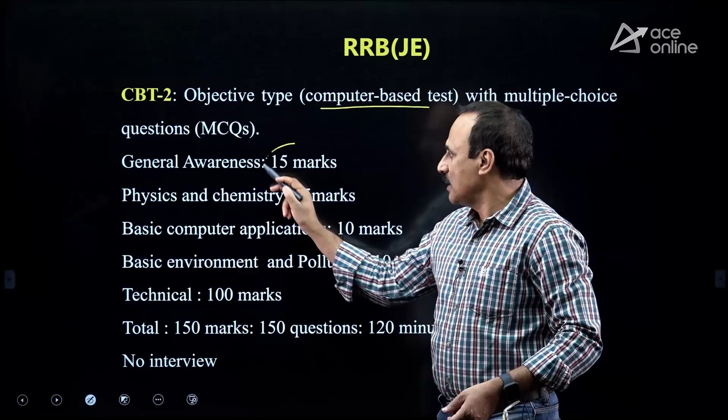Now we'll just touch the process. CBT-I is already over. Now coming to the CBT-II, it is also a computer based test with multiple choice questions. Here the main problem is general awareness. You have to be very careful about this general awareness. Physics and chemistry, they are asking you basic level of physics and chemistry questions, but don't neglect this area.

Basic computer applications also 10 marks, and basic environment and pollution 10 marks, technical is 100 marks. So, all together is 50% of the technical. This is actually the deciding area. Concentrate on this area with online test series and all other things. So, technical is 100 marks, total is 150. 150 questions, 120 minutes, 1/3 negative.

Time is a crucial point here in CBT-II also. No interview; after you get very good marks in CBT-II, having already qualified CBT-I, directly you will get the job, no interview at all. So, here today we will talk about transportation engineering. Coming to transportation, we have two parts. Highway engineering is given separately and transportation is given separately.

Two parts they have given, and I am hoping that out of 100 there may be 8 to 9 questions from this area. Minimum 8 to 9 objectives will come from this area, and that too theoretical questions, simple fundamental questions. Few specifications you need to learn by heart, that is all. And critical numericals, don't touch at all. Even though such questions are there, we have very much less time.

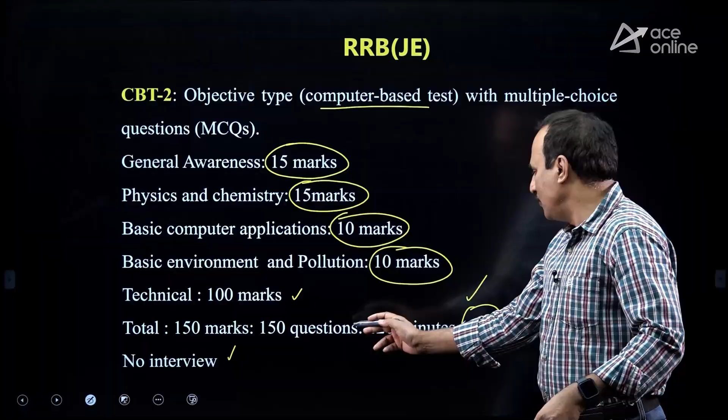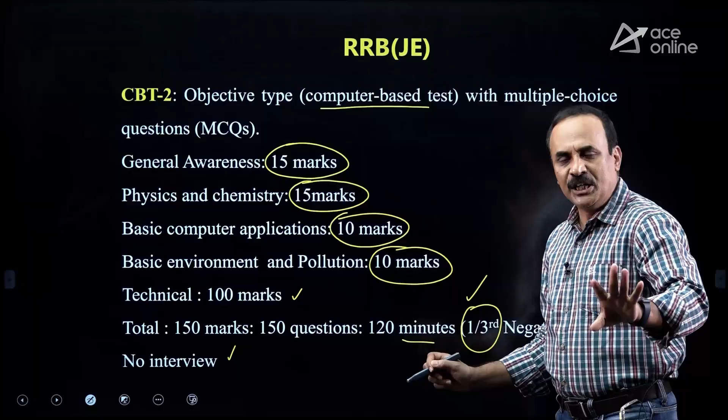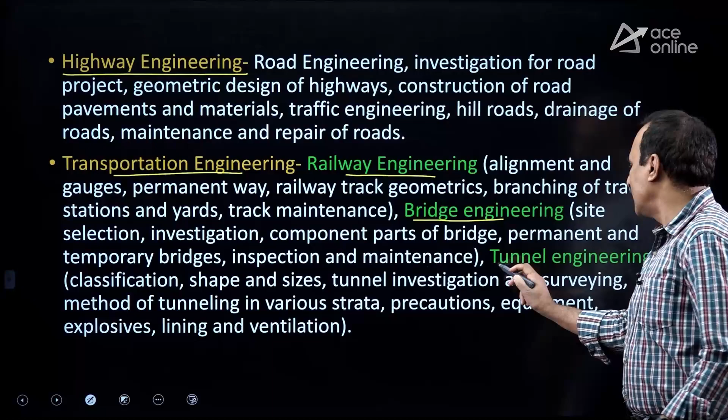You see, 150 questions, 120 minutes of time, less than 1 minute for each question. So, you can't solve the critical numericals. If a critical numerical question is there, just leave it initially. If time is available at the end, touch it, otherwise leave it. So, coming to transportation, here you have railway, bridge and tunnel engineering. Airport is not there, you just remember this point. Airport is not there in CBT-II.

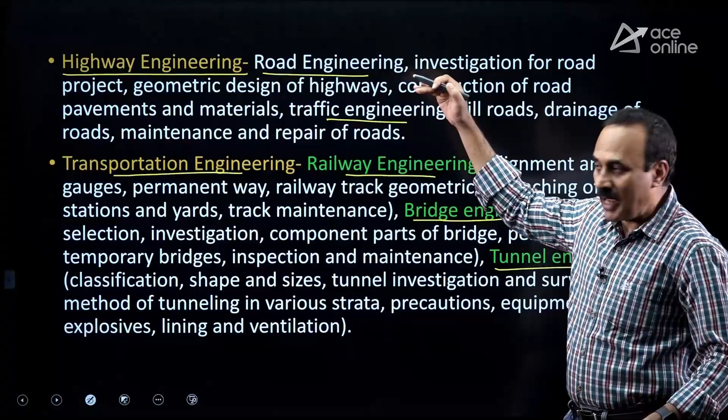And coming to highway engineering, you have road engineering, investigations for the road, geometric design, construction of the road, and materials used in road construction. Traffic engineering is also there. Hill roads, especially the specifications of the hill road, drainage and maintenance and repair works of the roads. So, apart from highway, you have railway, bridge and tunnel.

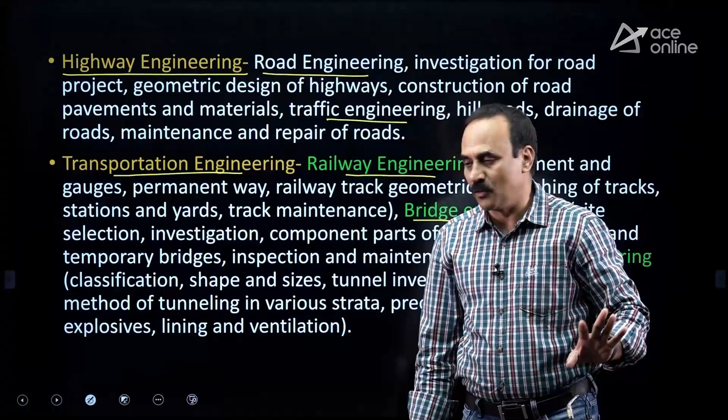Remember, don't touch airport. Previously, airport was also there in the RRB syllabus. You may see previous year RRB questions from airport. Don't touch those questions in the 2025 recruitment. And this RRB, you know, won't come every year. That's why be careful in the preparation. Last minute strategy is revise the concepts, revise the specifications and try to attempt more and more test series. There you can improve upon your capabilities.

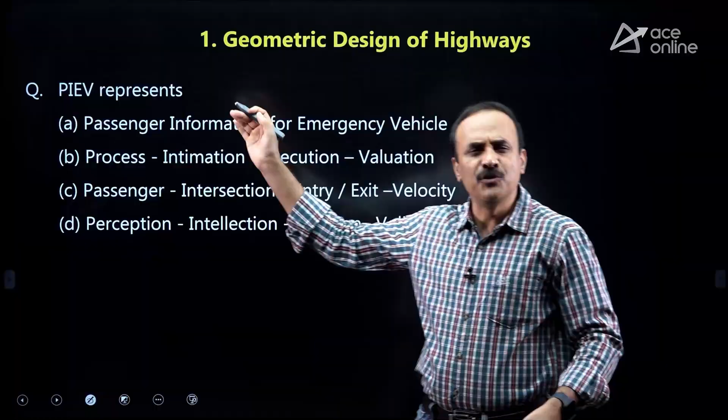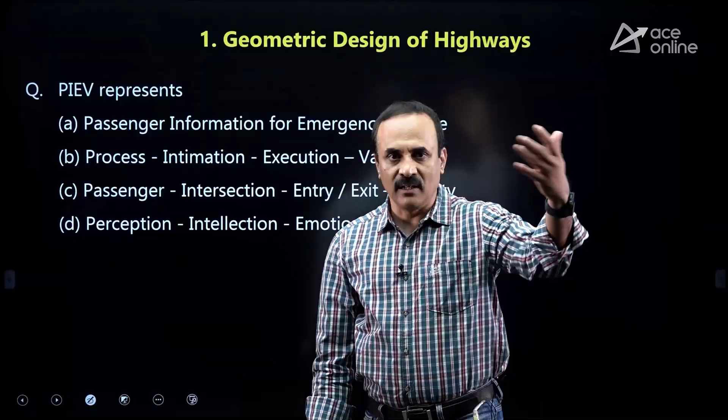We will touch few previous year questions of RRB. Let us see what is the level of questions coming. Mostly basic level questions will come because the prime qualification criteria is diploma in engineering. So, diploma holders, engineering graduates, masters holders, even PhD holders are writing the exam because of the very attractive salary package, and the jobs will be in the local area only. It is not transferable nationally, it is zone wise only. South Central is different, Central is different, Northern region is different.

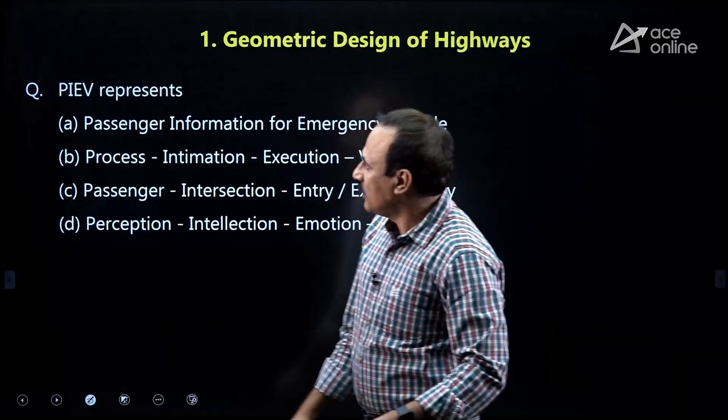So, coming to the first question, with highways, read the question and give me the answer, please.

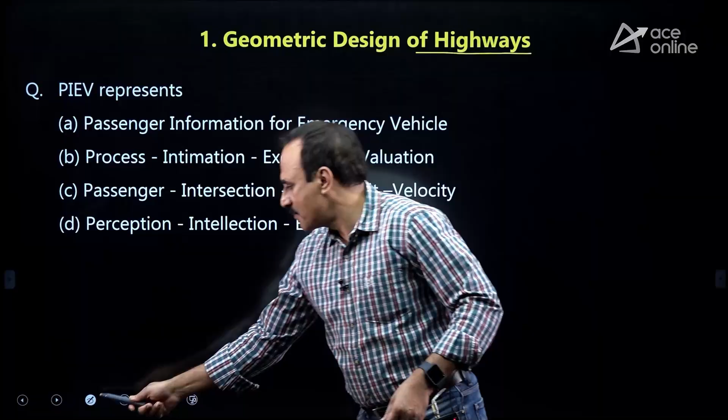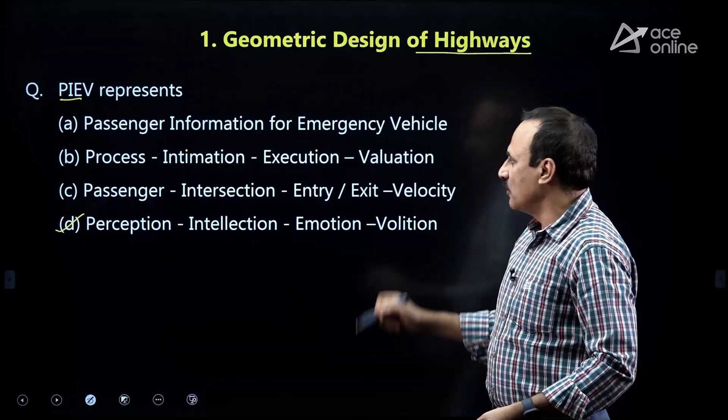If you look at the question, PIEV theory represents, it is a straightforward question; with little knowledge of transportation you can identify the answer. PIEV stands for perception, intellection, emotion and volition. Usually in theory questions, we need to select the answer by process of elimination, not by process of selection.

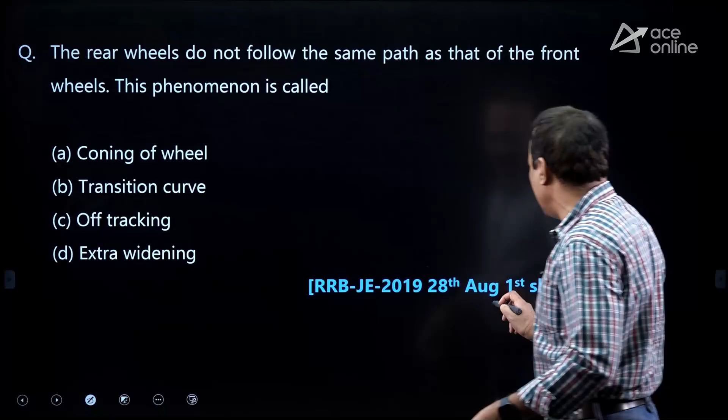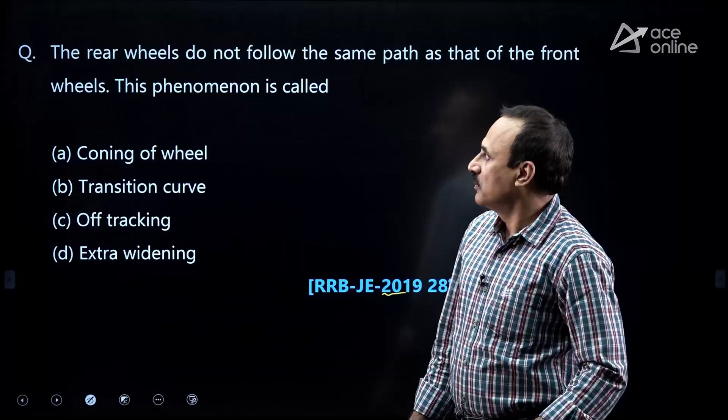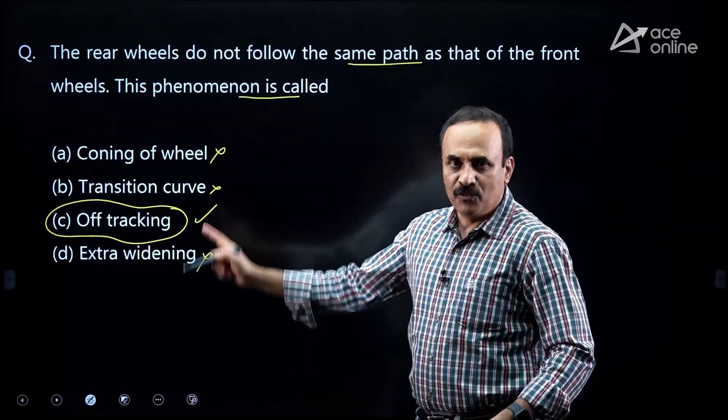The rear wheels do not follow the same path as the front wheels. This phenomenon is called... It is not coning of wheels. It is not the transition curve. Extra widening is to facilitate off tracking also, but actually the rear wheel track not following the path of the front wheel track, we call it off tracking. To facilitate off tracking and psychological widening, we provide extra widening. So, answer is option C.

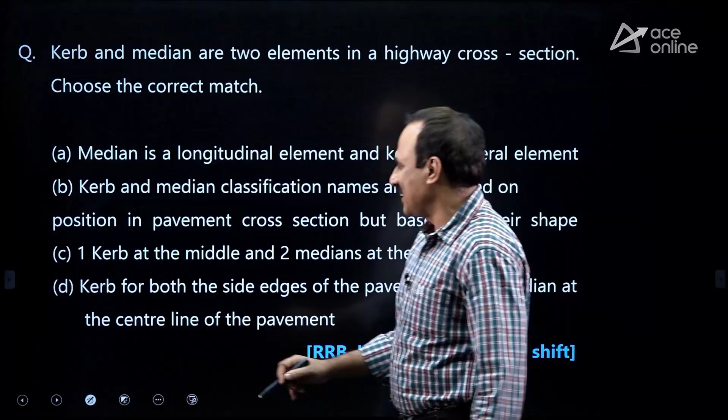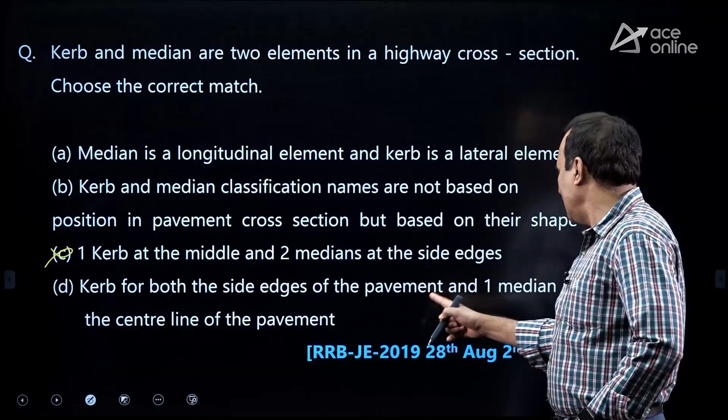Read this question and give me the answer here, please. Kerb and median are two elements in highway cross section. Select the answer. One kerb at the middle, two medians at the side edges. Actually, median means middle, so two medians won't be there. Process of elimination. Kerb for both the side edges of the pavement and one median at the center line of the pavement. Sounds good. Let us see the other statements also.

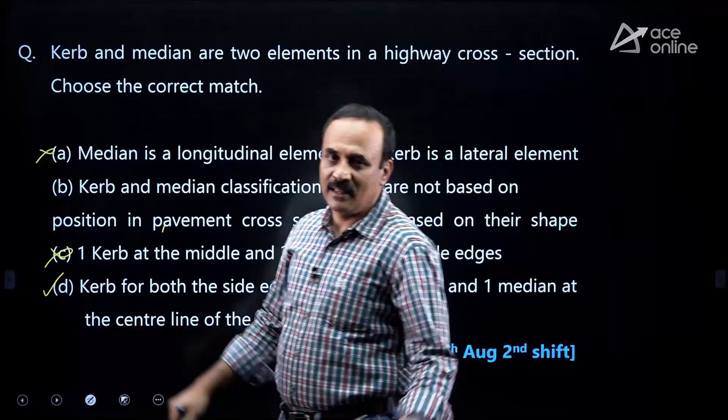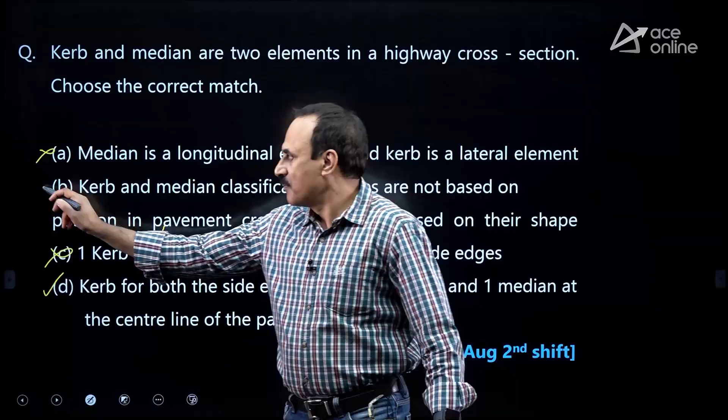Option A, median is a longitudinal element and kerb is a lateral element. Kerb is also along the length of the road, so kerb is not a lateral element. Kerb and median classification names are not based on the position in the pavement cross section, but based on their shape. No. Most appropriate answer is option D. Kerb is the edge of the pavement, median is the middle of the pavement. It is a traffic separator.

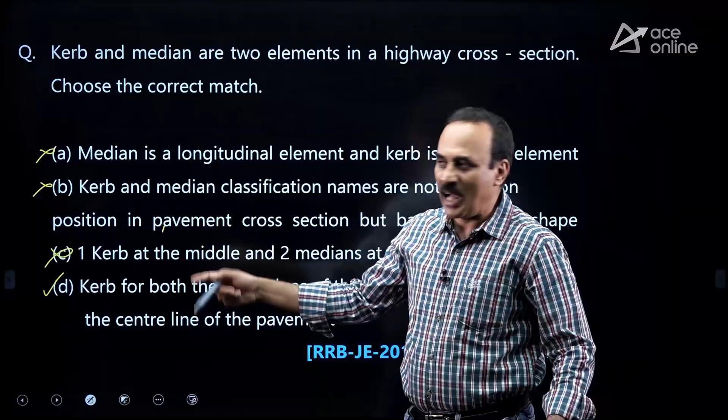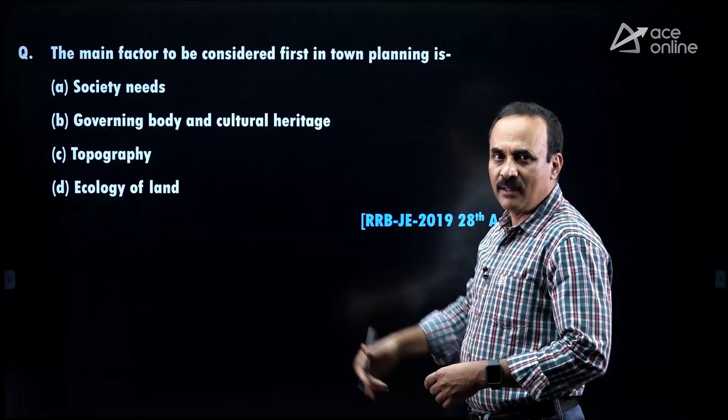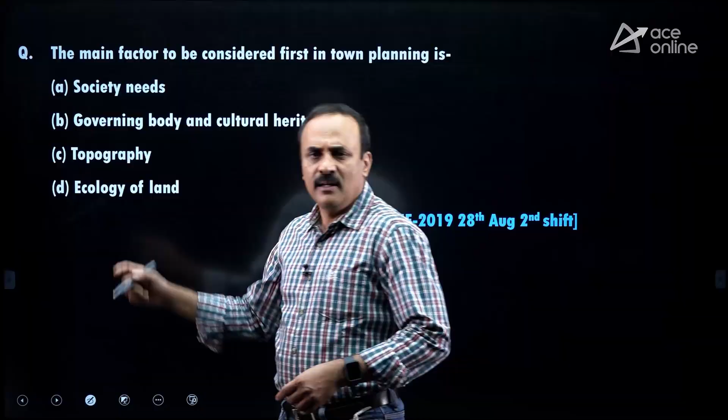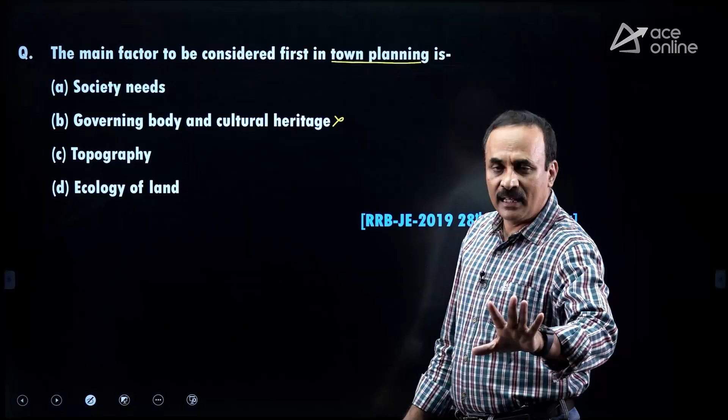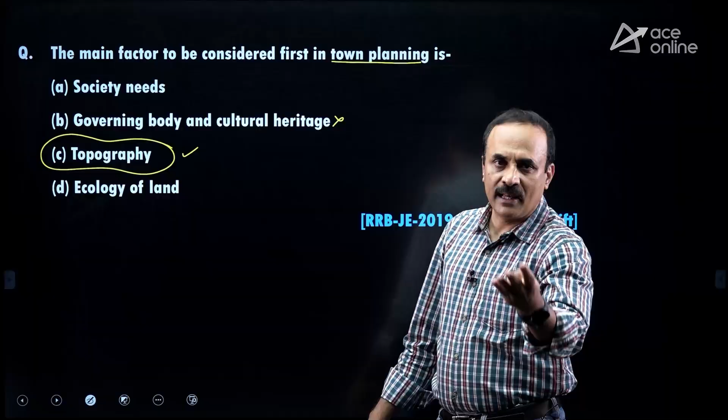Read this question and try to pin the answer. The main factor to be considered first in town planning. Actually, town planning is not exactly in our syllabus, but use the process of elimination. Option A, society needs, governing body and cultural heritage, you can eliminate directly. Topography is nothing but terrain. Ecology of land. Actually, the main factor in any road construction or planning work depends on topography, the terrain in a particular area: plain, rolling, hilly, mountainous or steep terrain. That plays an important role. So, the answer directly goes to option C.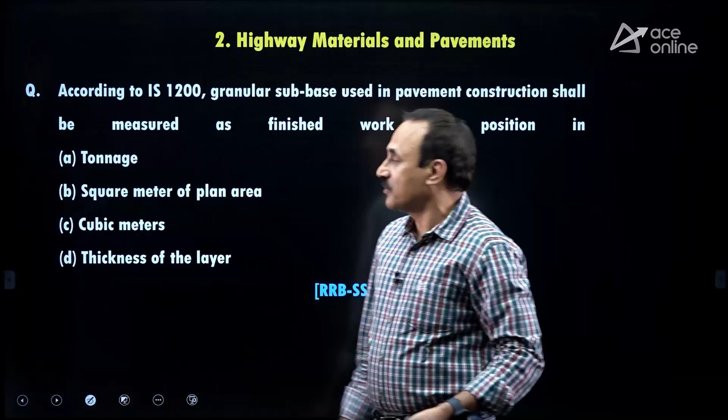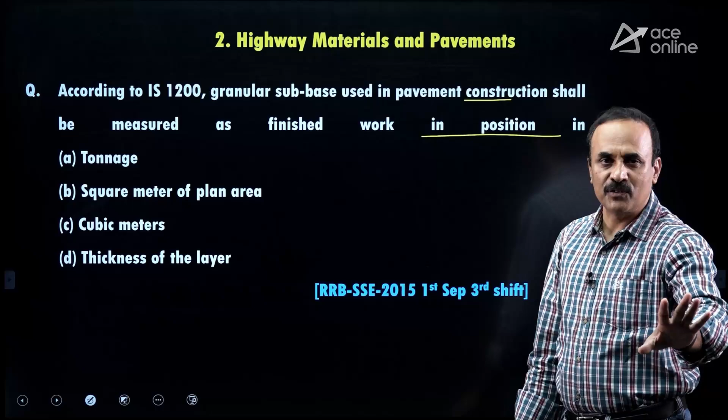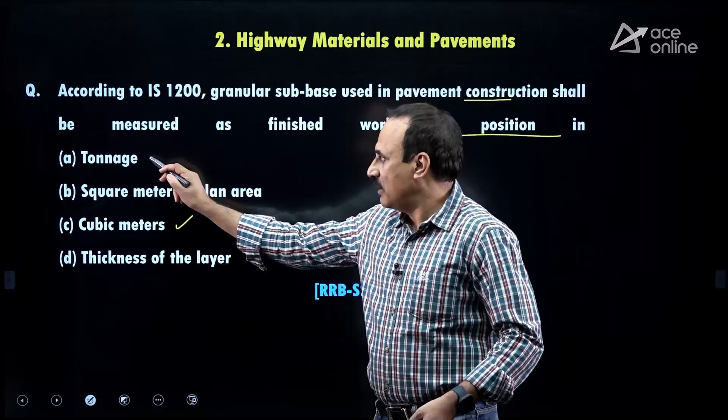Again read this question and try to give me the answer. According to IS 1200, granular subbase used in pavement construction shall be measured as finished work in position in which units? This is an estimation type of question in transportation, but the quantity of base course and subbase course is in cubic meters. We never use tonnage, never plan area in square meters, not by thickness; it is by cubic meter. This much cubic meter of material is required for subbase. Like that we estimate, and based on that we procure the material and use it.

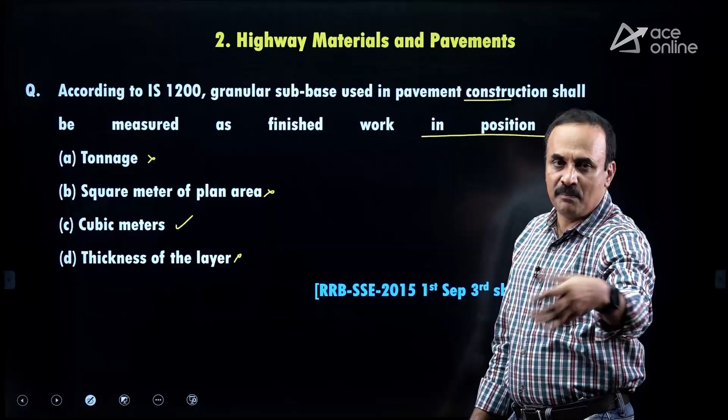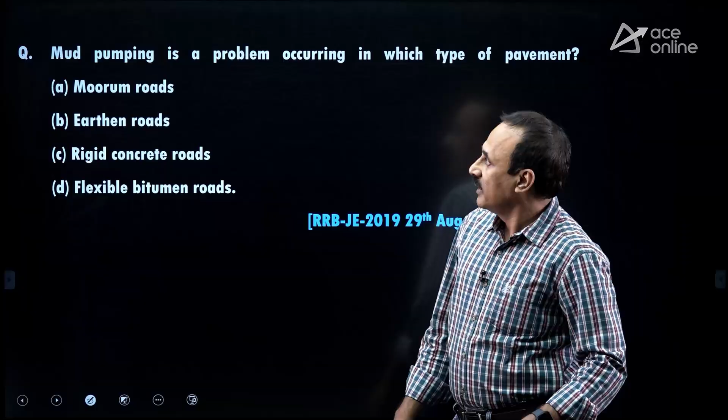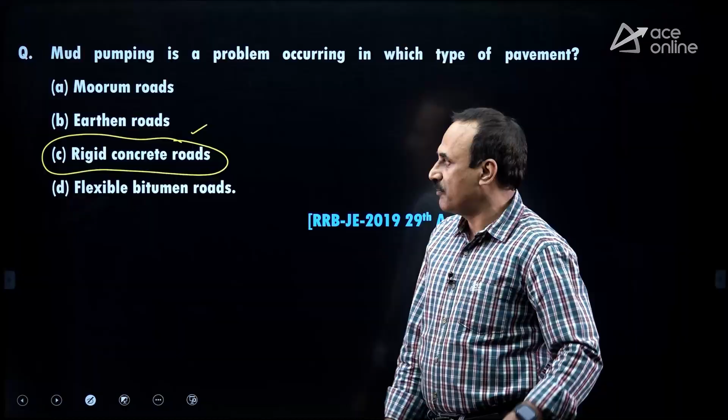Next is: mud pumping is a problem occurring in which type of pavements? Mud pumping is generally a common failure in rigid concrete pavements. Mud pumping is a very common failure in rigid pavements. In rigid pavements, we have only three types of failures: mud pumping, scaling and spalling.

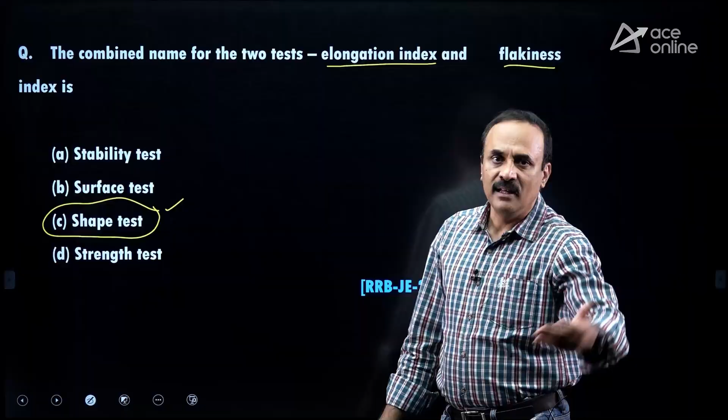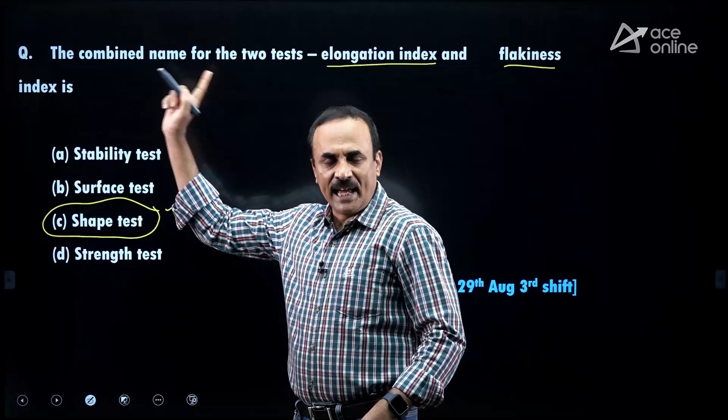The combined name for the two tests, elongation index and flakiness index. Actually, elongation index test and flakiness index tests are shape tests, which determine the shape of the aggregate which you are using in the road construction or concrete making. Usually we require angular shape. So, shape test is very important. The flakiness index and elongation index come under shape tests of the aggregates.

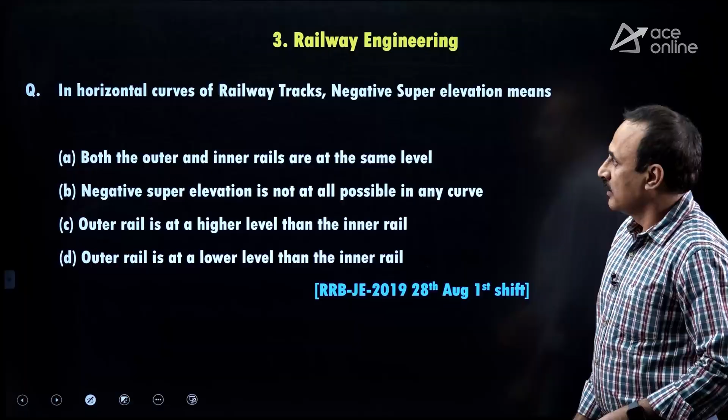So, look at the questions, these are from railway engineering. Simple questions came in the previous years. Look at the first question and try to give me the answer. The horizontal curves of railway track, negative super elevation means: positive super elevation means outer rail at higher level, negative super elevation means outer rail at lower level compared to inner. So, outer rail at lower level is negative super elevation. Positive super elevation or general super elevation will have outer rail or outer edge at the higher level compared to the inner. So, answer is option D.

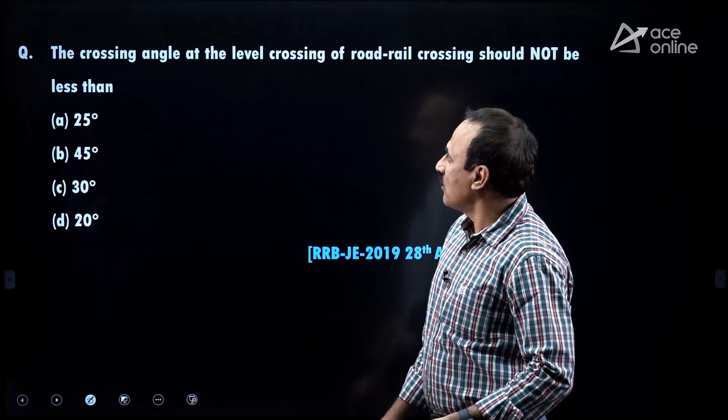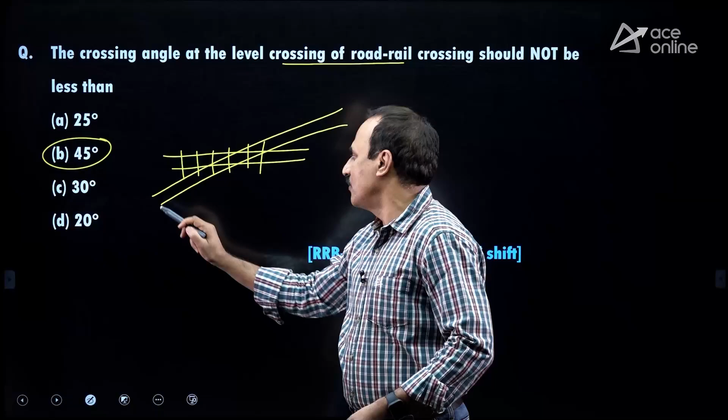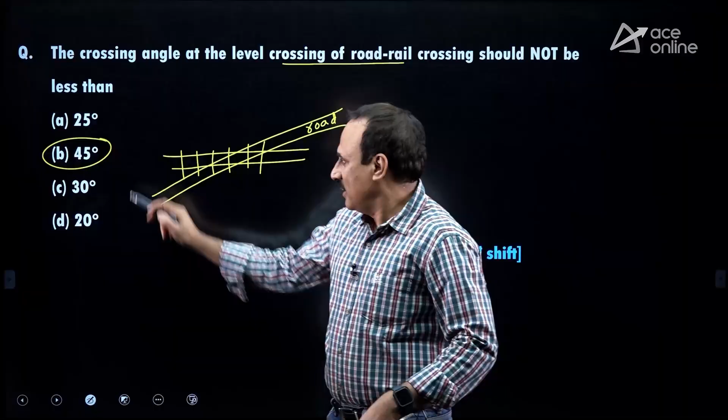Coming to this question, the crossing angle at level crossing of road and rail should not be less than 45. Level crossing means there is a railway track and a road is crossing that. If the road is crossing very parallelly, with less angle, then making the level crossing is difficult. Even while crossing, the visibility is also very poor. That is why, as per Indian railway standards, the level crossing angle should not be less than 45 degrees. Better is right angle intersection.

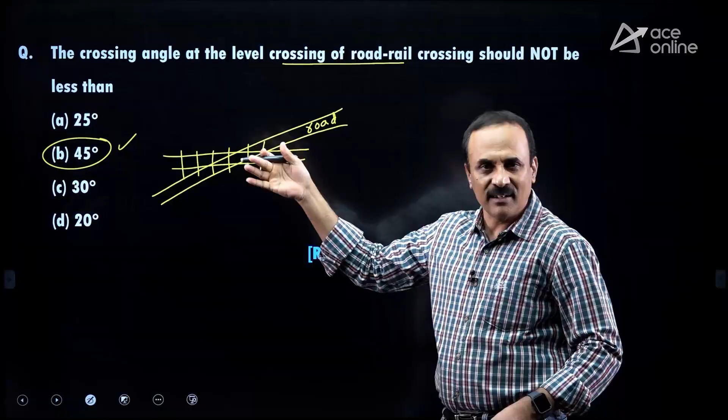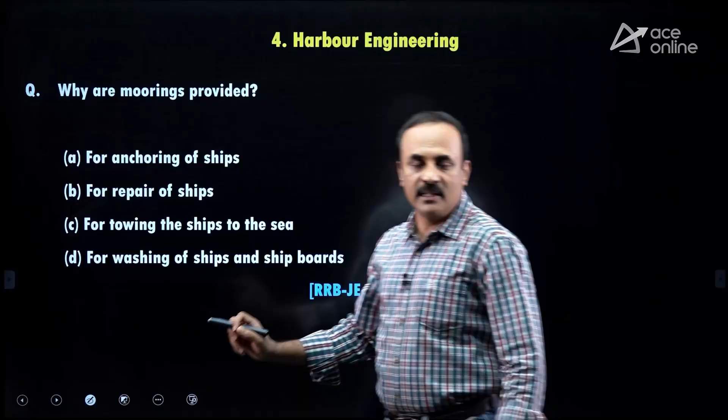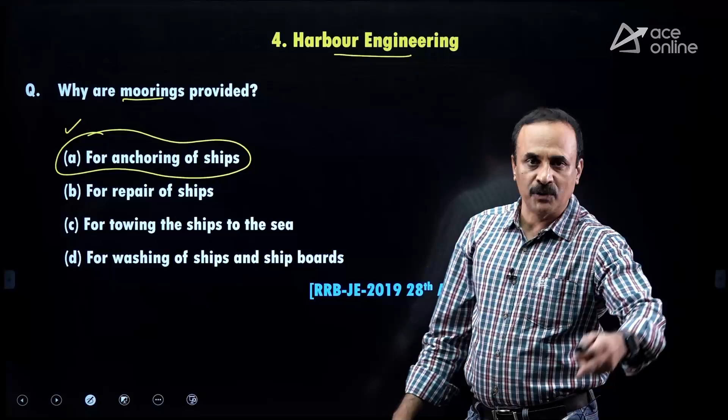Look at the previous RRB question, it comes from harbor engineering. Read and tell me. It is all based upon the terminology. In harbor engineering, if you remember terminology, it is more than enough. Mooring. Mooring is nothing but anchoring. Why are moorings provided? Moorings are provided for anchoring the boat or ship to the support. Okay, answer is option A.

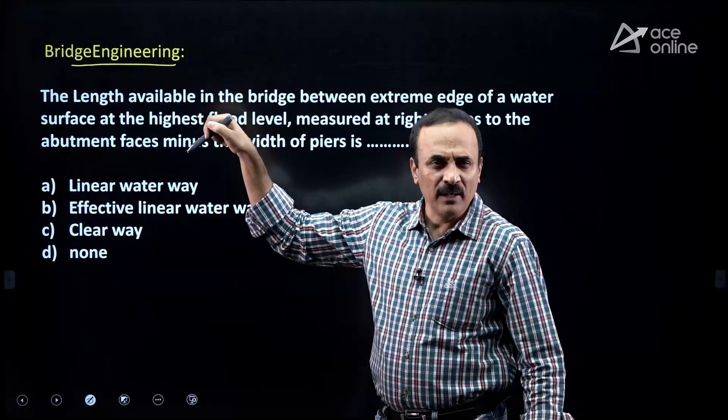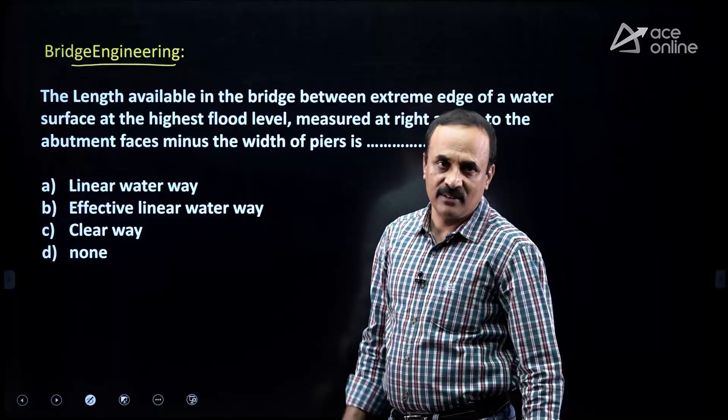Look at the questions. In the previous RRB, bridges were not there, it was included now. So I have taken general questions and important questions from bridges and tunnels. Previously, there were no RRB questions from bridges as well as tunnels. We will just see some important questions from the simple concepts.

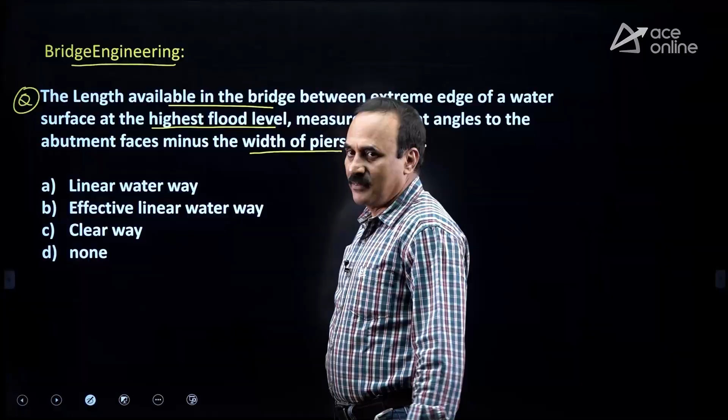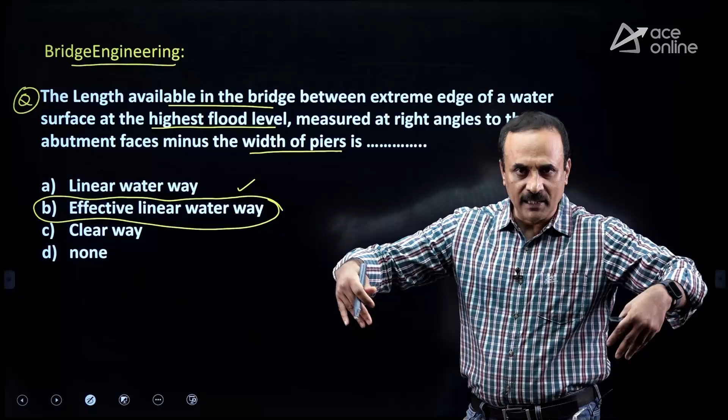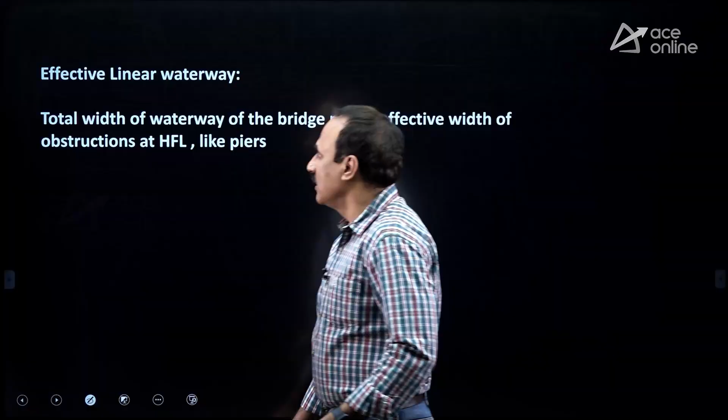The length available in the bridge between extreme edges of water at high flood level, measured at right angles to the abutment faces, minus width of the piers. Total width at high flood level between the abutments, minus width of piers, we call it effective linear waterway. The waterway, especially the width of flow available for the water excluding all obstructions, is effective linear waterway. Answer is option B. So, effective linear waterway is total width of waterway of the bridge minus effective width of obstructions at high flood level. Obstructions are intermediate supports, nothing but piers.

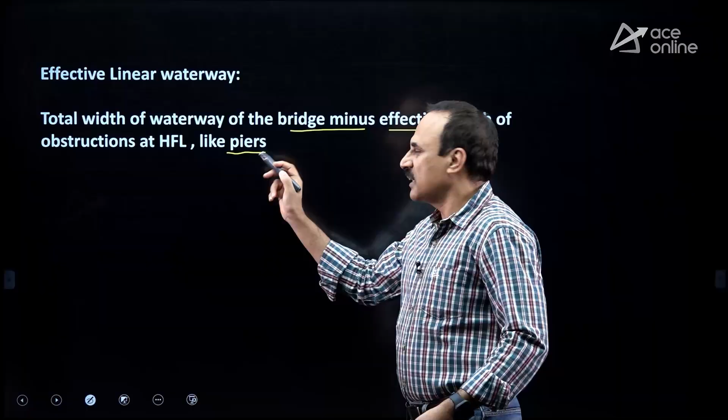Coming to the next question. Interruption due to submersible bridge is not more than: if there is a submersible bridge, interruption in 1 year should not be more than 6 times. This is also a specification given in the code, directly from the code.

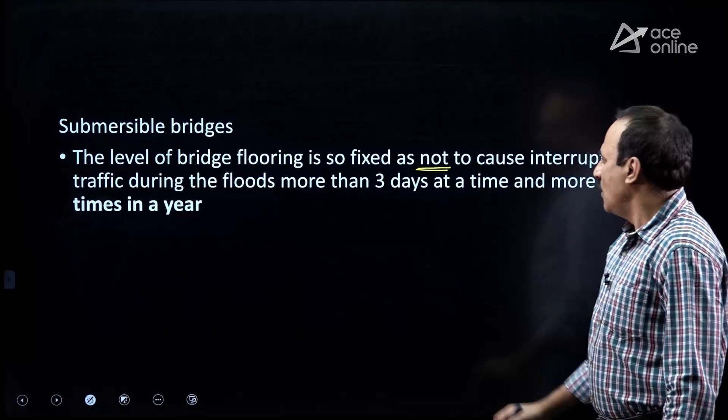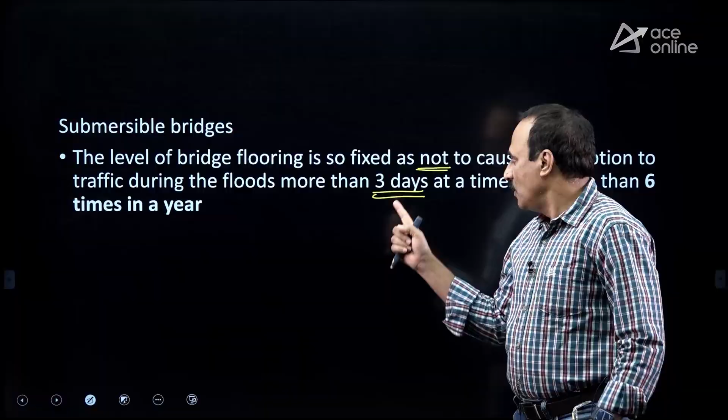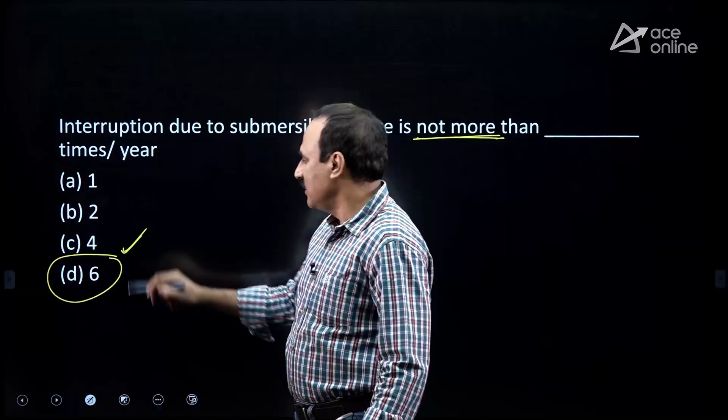For submersible bridges, the level of bridge flooring is so fixed as not to cause interruption to the traffic during the floods more than 3 days at a time and more than 6 times a year. There should not be interruption more than 3 days continuously, or more than 6 times a year. So, our answer to the previous question is, the maximum interruption per year will be 6 times. Continuously, 3 days maximum.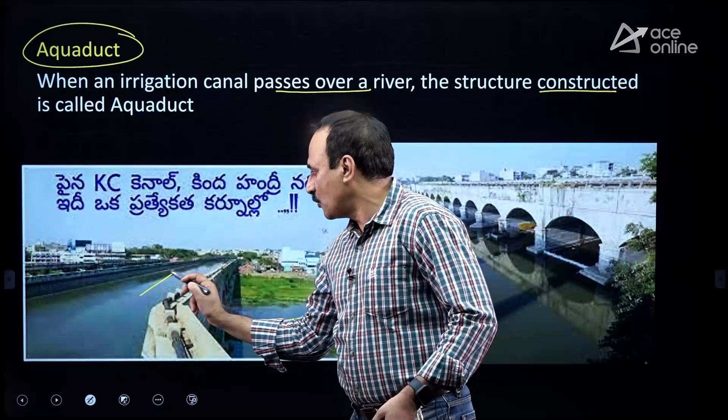Coming to this question, when an irrigation canal passes over a river, canal is over the river, what is it called? So, canal is over the river, we call it an aqueduct. When an irrigation canal passes over a river, such a construction is called aqueduct. So, this is one example of an aqueduct. This is in Andhra Pradesh, in Kurnool district, where the Handri river is going below and KC canal is going above and crossing the river. And this is another view of that same aqueduct in AP, Kurnool district, Kurnool town. So, answer is aqueduct.

If a river is passing over a canal, we call it a super passage. Level crossing means the river and canal are at the same level, which is not possible.

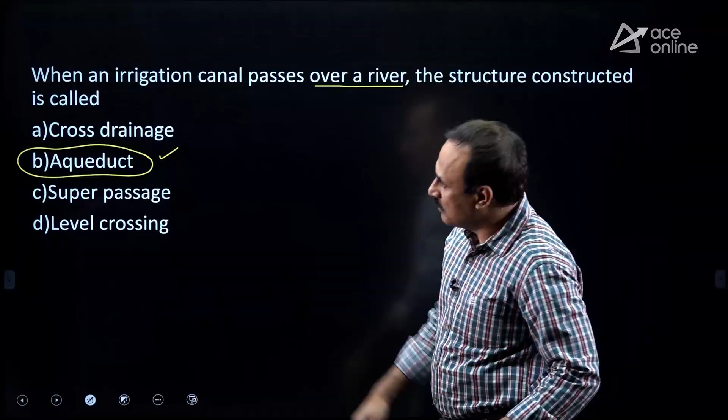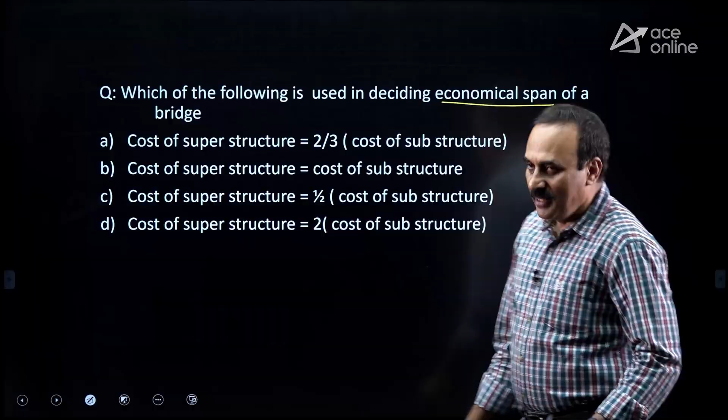Okay, coming to the next question: which of the following is used in deciding the economical span of a bridge? This is a very standard question. You can get economy by making the cost of the superstructure equal to the cost of the substructure. Like that, we plan to get maximum economy.

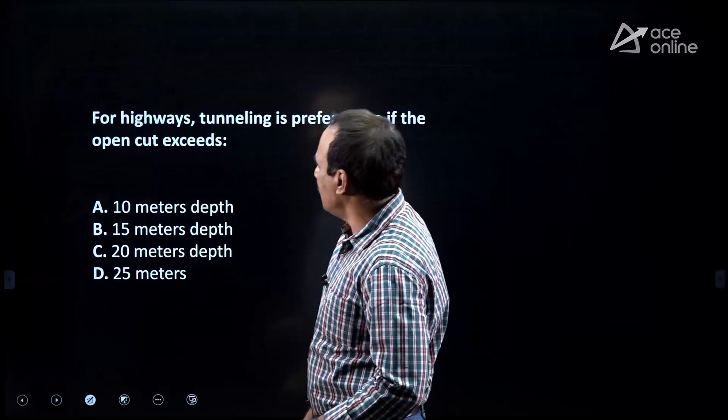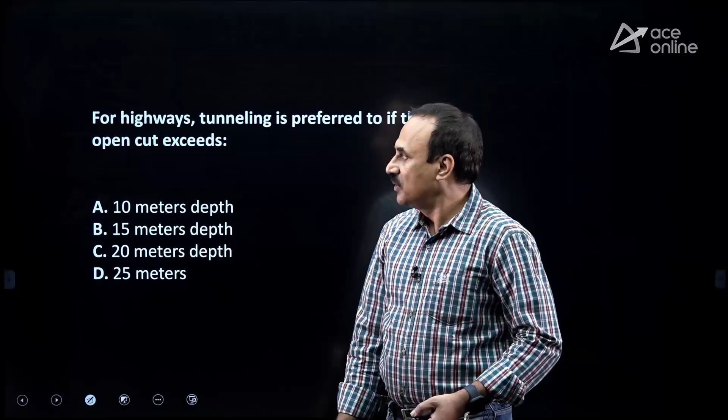See this question, for highways. Now these are questions from tunnels. Previous tunnel questions on RRB are not available because these are all added now. So for highways, tunnel is preferred to the open cut if the depth exceeds...

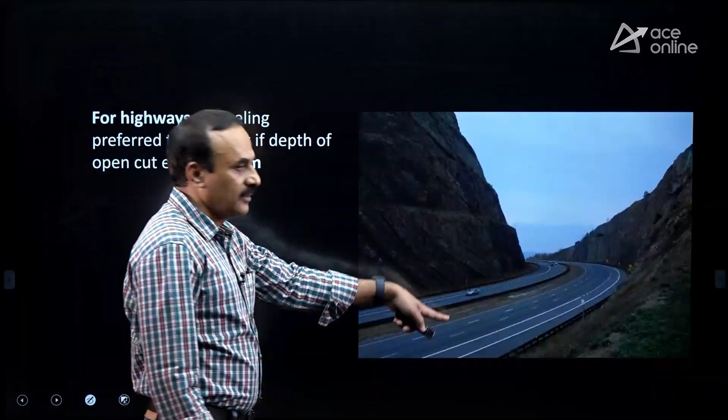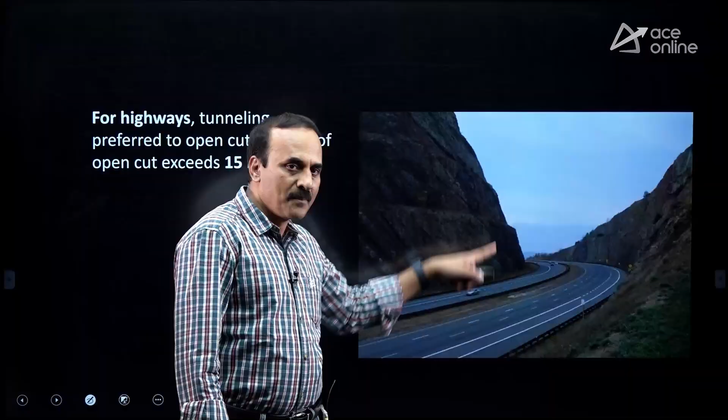Actually, this is a open cut. Open cut means you are cutting the soil, you are cutting the hill and constructing the road. This road is open to the sky, you can see the sky, the sun and all. This is called open cut. Tunnel is where you can't see the sun or sky.

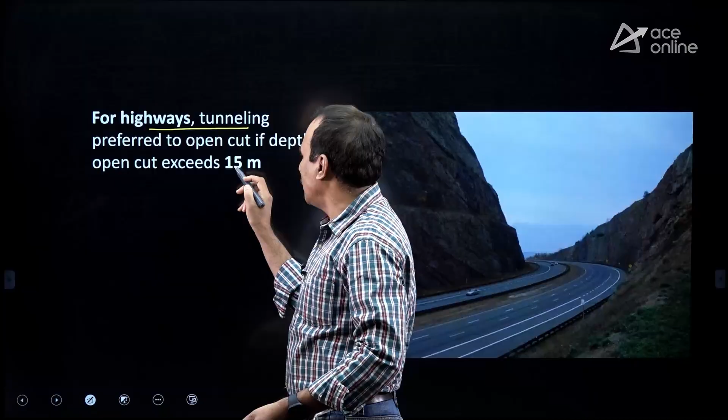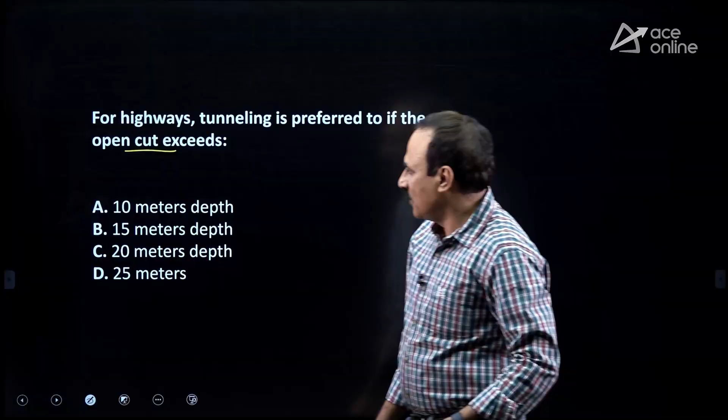So the specification for highways is: tunnel is preferred to open cut if the depth exceeds 15 meters. If the depth of the cut is more than 15 meters, open cut is not economical, go for tunnels. So 15 meter depth, the answer is 15 meter, option B.

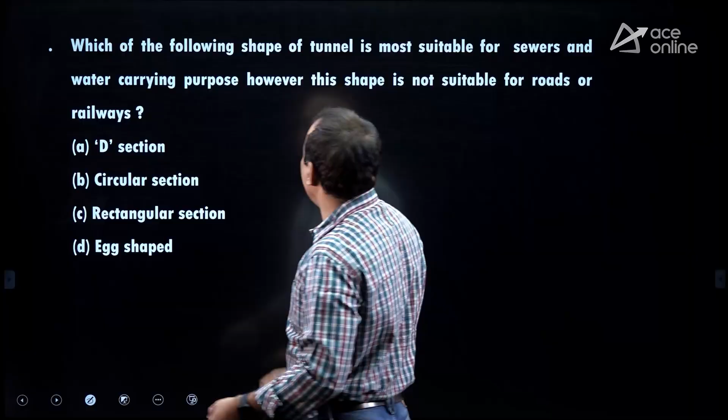Come to the next question: which of the following shape of tunnel is most suitable for sewers and water carrying purpose? However, this shape is not suitable for road and railway.

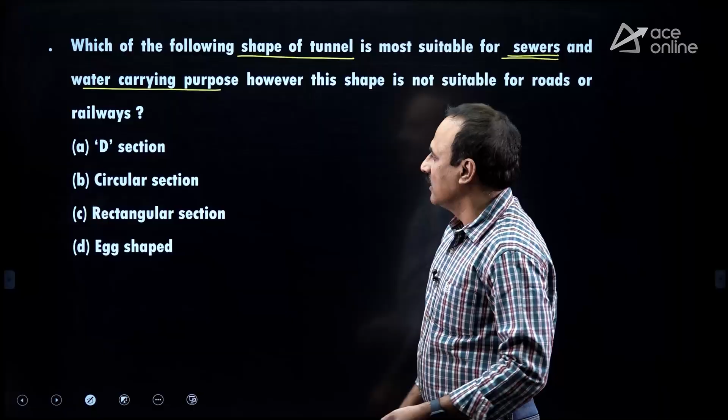A D-shaped tunnel will have a flat bottom. If the flat bottom is there, you can use it for construction of road and railway, but not for sewers and not for water transport system. Circular is okay, rectangle also has a flat bottom, so it is also not suitable. So rectangle not suitable, D also not suitable, circular is also suitable, but egg-shaped is more suitable for sewers.

egg-shaped will be something like this. It is very, very effective for sewers, so that if the water level is very less, you get some velocity, and even if the water level is very high, you will get the same velocity. You will get self-cleaning velocity in egg-shaped sewers. That means whatever might be the depth of flow, you can maintain the same speed, so there should not be any sedimentation if you use egg-shaped.

If egg-shaped is not there, you can go for circle. If egg-shaped is there, the most appropriate answer is that egg-shaped is the most suitable shape.

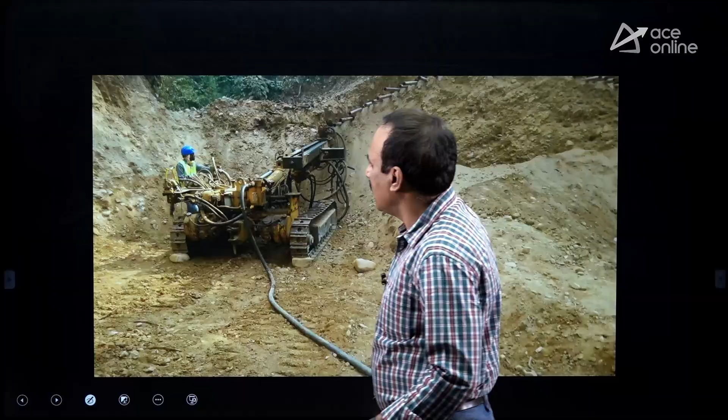Okay, now coming to the next question: forepoling method is generally adopted in tunneling in soft ground. In soft ground, we use the forepoling method. We drill all the poles like this and give support to this overburden soil, and then we slowly remove the bottom layer of the soil.

So what you need to remember is, especially in tunneling, go through the different shapes of tunnels and their usage in practice. Tunnel shapes and usage you have to learn by heart. Next, tunneling methods in soft soil and then tunneling methods in hard rocky soil are enough from the tunneling point of view, and some definitions of tunnel. So the forepoling method is for soft soil.

Next, coming to this question: accumulation of dust in tunnel due to drilling and blasting is a serious hazard, especially while digging a tunnel. We are digging the rock, and rock has a lot of silica. If fine particles of silica go into the lungs of the workers there, we will get a very dangerous disease called silicosis. The silicon-related ailment is silicosis, a very dangerous disease.